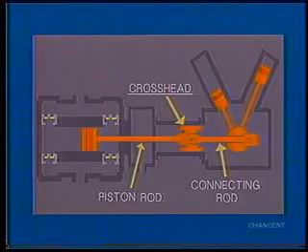The crosshead joins the connecting rod and piston rod. Passing through the distance piece, the piston rod drives the piston. The crosshead allows the piston rod to move only linearly, yet allows the connecting rod to have rotary motion.

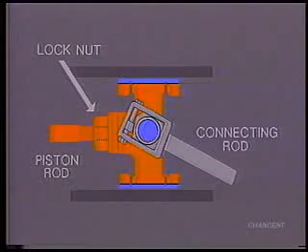A lock nut secures the piston rod to the crosshead. The connecting rod is attached to the crosshead with the crosshead pin. The crosshead travels horizontally and must have limited vertical variation.

This confinement is maintained by the flat or circularly bored crosshead guides. Inside the guides, the crosshead shoes maintain the vertical position of the crosshead. While the shoes are replaceable and adjustable, shims on both of the shoes provide additional adjustment.

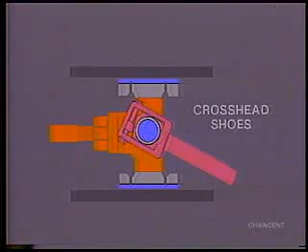Both ends of the connecting rod are equipped with heavy-duty sleeve bearings. These bearings are adjusted using the adjusting wedge and adjusting bolts. The sleeve bearings may be made of babbitt, bronze, or aluminum.

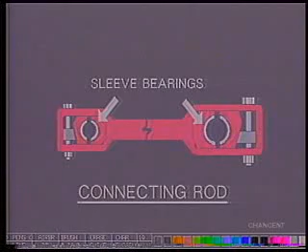Inside the sleeve bearings, the crosshead pin and crank pin are separated from the bearings by a film of oil. This is crankcase oil supplied under pressure through holes in the bearing surface.

The power to operate the compression unit is usually supplied by either electric motors or engines. The most typical, however, are combustion-type engines. In these, power pistons are connected by connecting rods to the crankshaft.

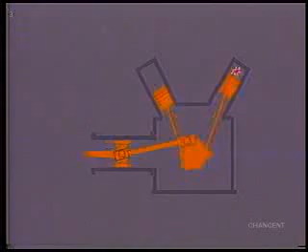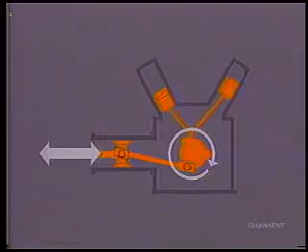In addition, the crosshead is connected to the crankshaft by a connecting rod. Thus, rotation caused by the power pistons is translated by the crankshaft, connecting rod, and crosshead into reciprocating motion, which powers the compression unit. Now, just as lubrication promotes smooth compression unit operation, lubrication of the drive unit is equally important. However, lubrication of the drive unit will be covered in a later module.

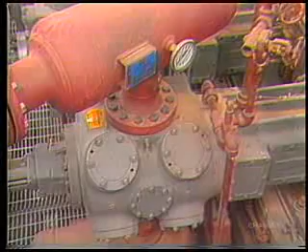Often a compressor has more than one compression unit on the same frame. In these arrangements, each compressor piston is powered through the same crankshaft. One example of a shared crankshaft is a balance-opposed compressor, like this one. The cranks are arranged so that the motion of one piston is balanced by the motion of the opposite piston.

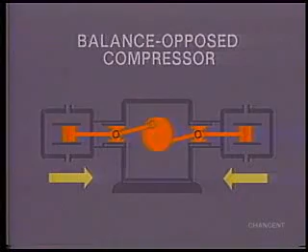Balance-opposed compressors are often externally driven. The compressor crankshaft is coupled to an engine or electric motor. Others may be engine or motor driven through a V-belt drive or motor, or turbine driven through speed-reducing gears.